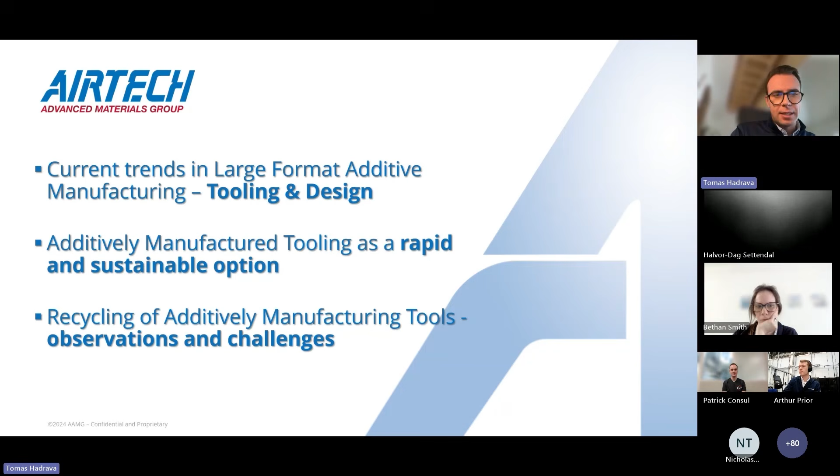And also, I'll be talking about the recycling of additive manufacturing tools at AirTech. What are our observations and what are the challenges? And Arthur actually covered that topic very well.

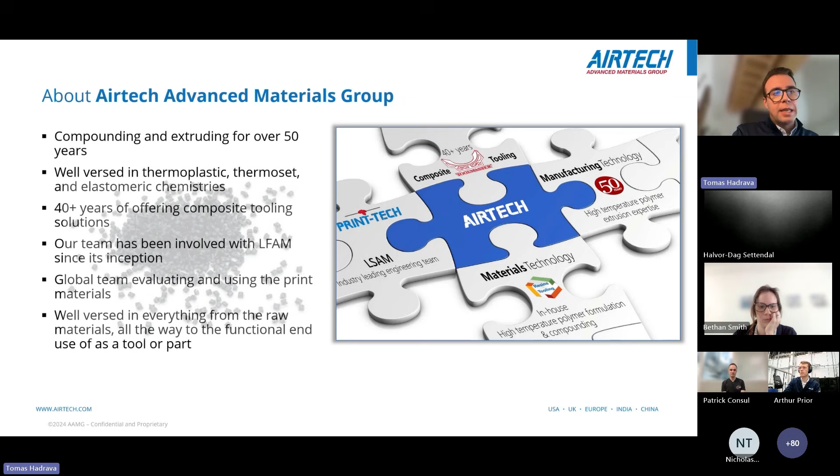Something about AirTech. We were established in 1973, more than 50 years ago. We are known as a polymer extrusion company, mainly active in composite consumables. However, roughly 9 years ago, we started digging into large format additive manufacturing, and our key members have been in the LFAM world since the very beginning, since 2012, 2013. So we are evaluating the options in large format additive manufacturing, developing materials, and also we are working as a service bureau in the US and in Luxembourg.

Something about additive manufacturing in general. This slide is covering the tooling. So why is it a rapid and sustainable option? Well, as Arthur also mentioned before, the printing process typically takes a couple of hours. From my experience, 1 to 2 days. We also printed tools that were being printed for 5 to 6 days. These tools were 12 meters long and 2 meters wide, so we have a huge machine.

But this is the overview of the entire process. There are pellets, there is the extruder, and there is the tool. And on the tool, we see the part which was demolded. So we are talking about direct tooling. You don't need to do pretty much anything else with the tool. You print it, somehow post-process it, but that's it. So I'll be covering direct tooling here.

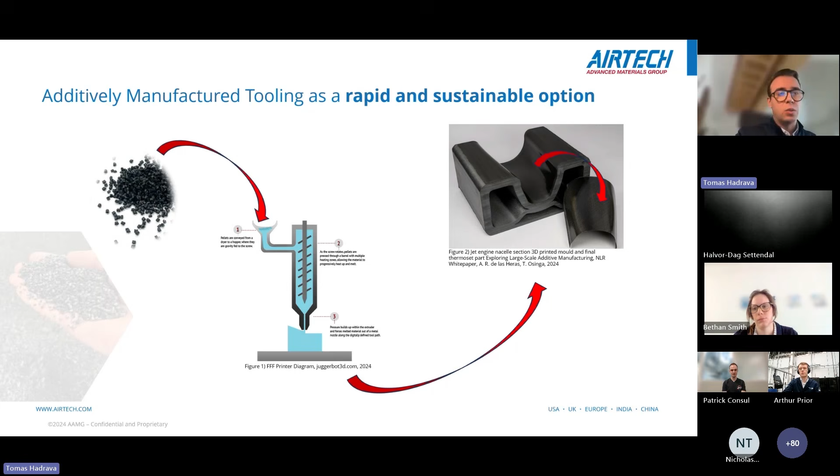A little bit more in detail how the process works. I borrowed this nice overview from NLR in the Netherlands. Basically, everything starts with a CAD file. Then there's a necessity to use a slicer. There are a variety of slicers on the market. The slicer will help to slice the tool and to prepare the printing process.

And then on the third picture from the left, there is the actual printing. The actual printing takes the shortest time of the entire process. That's, as I said before, tens of hours, but nothing more. I would say the biggest time consumer is preparing the CAD file, designing the part, designing the tool, and then slicing.

Of course, when you print a tool, and that applies to all kinds of tools in the market, not only additively manufactured tooling, we recommend annealing these tools. So that's another step, annealing these tools in the oven, and then machining the tools when the stress is already released after the annealing. Then step number 6 is, I would say, the tool preparation. It means sanding, polishing the tool, applying sealers, microporosity sealers, or release agents.

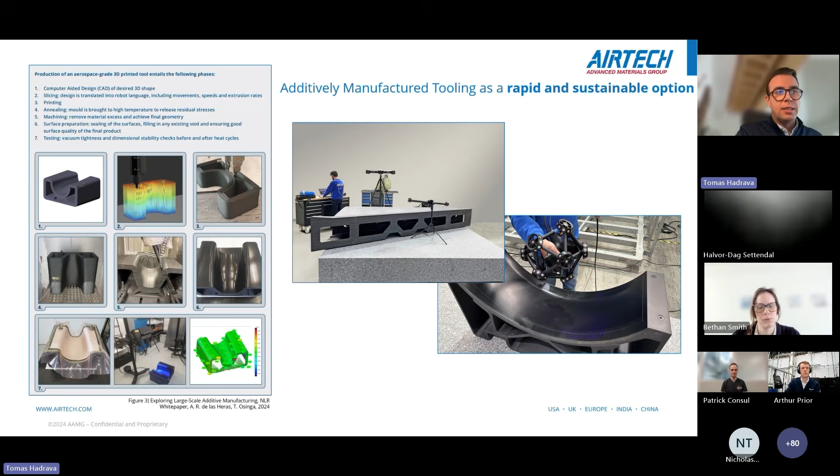Just covering the current trends in large format additive manufacturing in terms of tooling. Here are a few pictures that we already published in the past. On the upper picture, that's the general tool we use for testing. Then we have a picture of a tool that was delivered to a customer in the UK, done for the aircraft demonstrator. The third tool is a tool for resin infusion. It's not visible that it's printed, but it's underneath, I think it's a peel ply, which is right on the surface of the tool.

This was printed out of PETG, and then we have the fourth tool on the right upper corner, and that's a fan cowl repair tool, which was done for a company repairing Boeing 777 engines, which are the biggest ones in the world, if I remember. You can see the tool is pretty big. You can see my colleague there. The tool is roughly, I think, 6 or 5.5 meters long and 2.5 meters high, and also 2.5 meters wide. It was printed in 3 pieces, then assembled together, sealed and bolted together, and now it's performing.

Here on the lower picture on the left side, we have some print of, I think it's a blade for rotorcraft or something. Then another picture, it's a standard aerospace part looking tool with all the stiffeners. I like this picture because that basically shows what AirTech all does. It's the entire tool, the material for the tool, and it's also the material on top of the tool, the composite consumables there. And then we have some other toolings. Here, the last one is the trimming fixture.

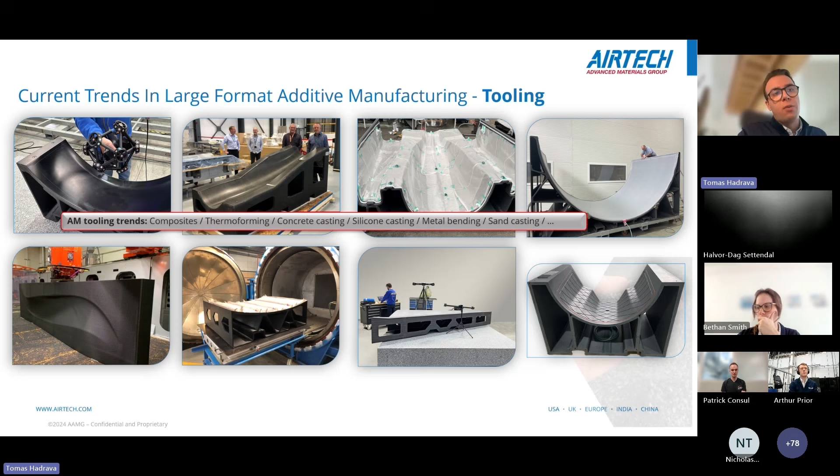There's the opposite world to the tooling, and that's design and end-use parts. Here are a few examples. Nothing really to say about the design. It's really depending on the project and on the designer. I always say I'm an engineer. For me, a color is a color. So green is green, and white is white, and pink is pink. But there are other colors and so I'm learning that. However, it really depends on the project, on the customer. However, from the material standpoint, the development of these materials is, I would say, as difficult as the material development for tooling because the requirements are pretty high. I'll be covering the requirements in the next slides.

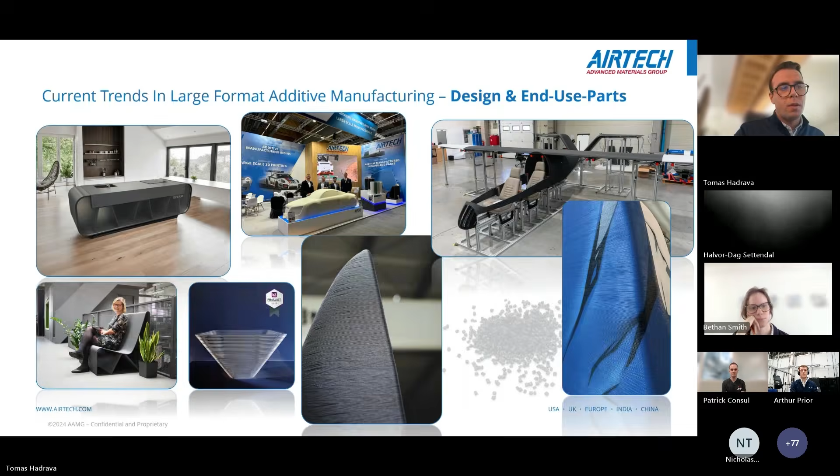The material requirements for tooling materials. So coming back to tooling, then I'll switch back to design. For tooling, of course the material needs to be highly thermally stable, needs to have a low coefficient of thermal expansion, good mechanical properties, excellent dimensional stability over time, so not only for a few parts. Again, good mechanical properties, good surface machinability. I think Arthur mentioned it as well. Most of the tools are CNC machined and then polished after the manufacturing process. So the material itself needs to be capable of these actions.

Strong interlayer adhesion. We always teach customers to respect the rule of layer time and layer temperature. And then, of course, the material needs to be chemically resistant when you apply the release agents, sealers, but also when you clean the tool with, for example, isopropyl alcohol or similar.

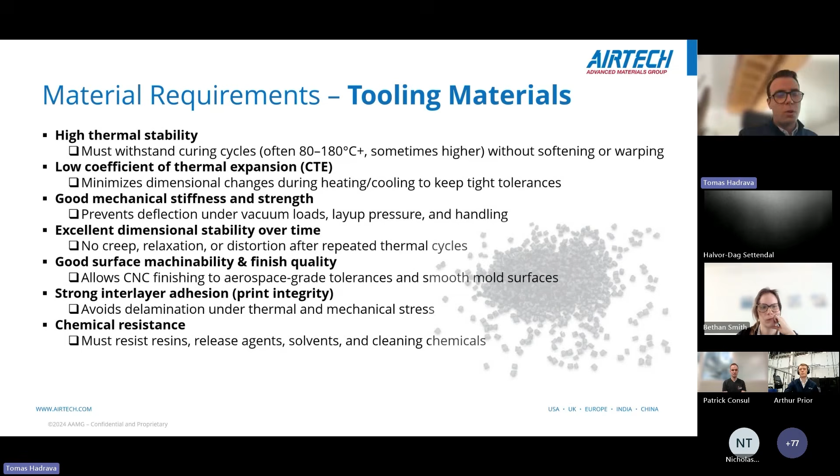And now, material requirements for the design and end-use parts. Typical requirements are salt, water, and moisture resistance, then UV stability or weathering resistance, depending where the object will be placed. The big thing is the flame retardancy, so FR rated materials, or at least low smoke rated or low toxicity rated materials. High impact resistance, again, excellent mechanical properties. Thermal resistance; we have applications that are being printed for Dubai or the UAE area, so you can imagine that the temperatures there can go pretty high.

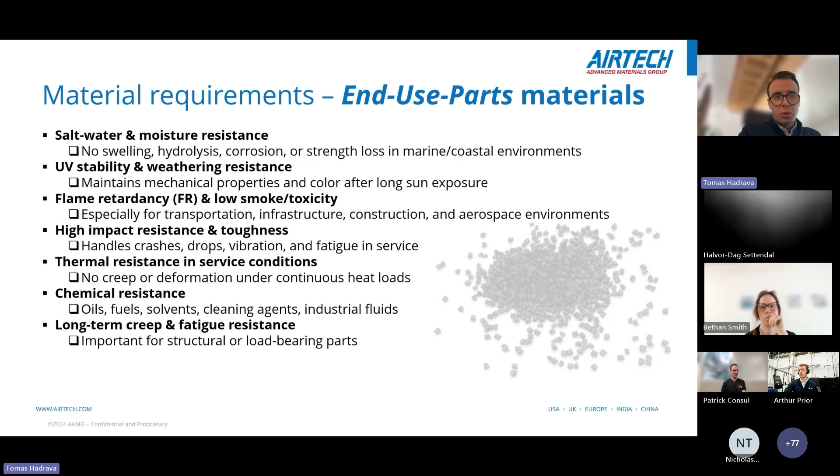Chemical resistance, again, long-term creep, fatigue resistance. I would also add one more, which is yellowing. I know that it's a big topic now in the designer world, where the customers want to have a clear material, but they want a clear material which will not turn yellow in 1 or 2 years placed outdoors.

What materials are used in general, or what materials are meeting these requirements? I would say these are the most used. There are also other, for example, polyolefin-based materials that are also being used in additive manufacturing widely. But in the tooling, it's mainly PETG, ABS, polycarbonate, and PEI or PESU.

The high temperature materials are typically filled with carbon fibers. The low temperature materials or the medium temperature are filled with glass fibers and carbon fibers. In terms of the design materials or the materials that are used for the end use parts, it's similar. However, we don't see big demand for the high temps, I would say.

It's mainly polycarbonates, a lot of PETG, I would say mainly it's PETG, but we have some niche materials like nylons, recycled nylons, elastomers, and again, polycarbonates, depending on the project. There are really very specific requirements for these kinds of applications.

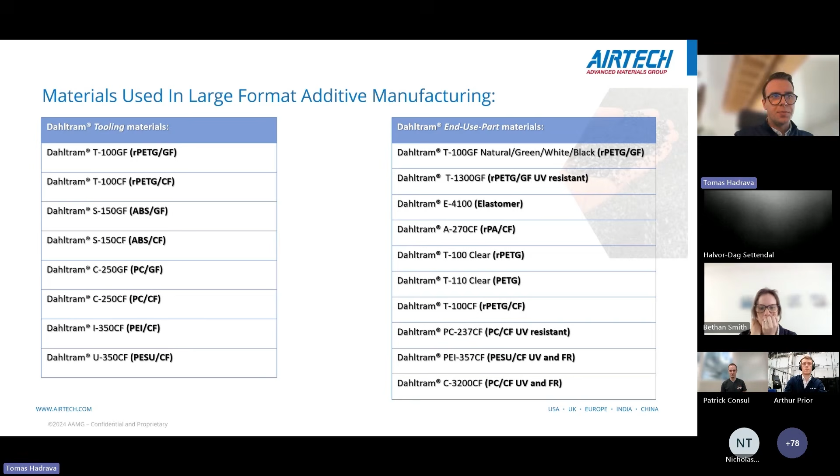Arthur covered that very well. I just want to make sure we get a point: recycled and recyclable. Most of the time I'm traveling and visiting customers, and we talk about materials and how we can recycle them, whether the material is recycled or recyclable, and then on top of that there is the accent thing, right? My accent or the customer accent.

So there are the recycled materials and recyclable materials, where the recycled is the one that already somehow worked in the previous life. We have the recycled PETG. Then it means that that kind of PETG already was working somewhere else in a certain industry. It might be water bottles or the packaging industry or anywhere where we can find PETG.

However, the recyclable material is the virgin material, but it can be recycled after the installation, the project is over, after the tool is not needed anymore. Then you can take it and recycle it, how Arthur described it. I'll be also covering that in the future slides.

So two different things. I would say most of the materials used in large format additive manufacturing are recyclable. There might be a few exceptions, but most of them are really recyclable, and some of them are already recycled and are working pretty well.

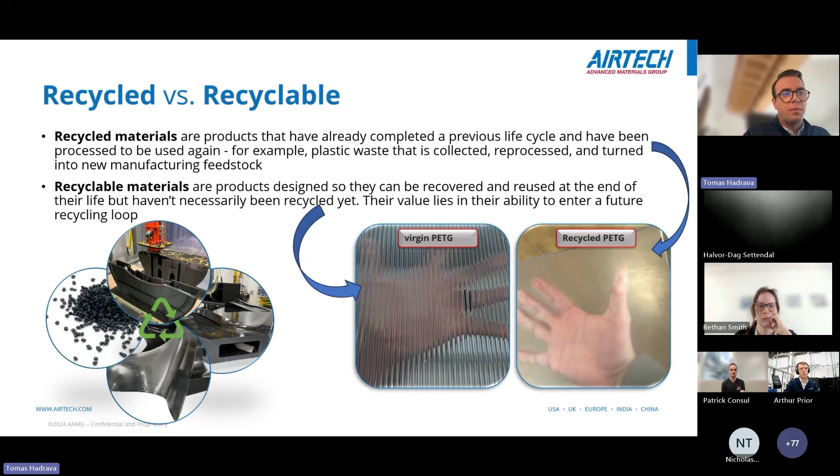Recycling, the observations, what we have or what we've done, because we recycle material internally for our own use at the moment. I'll be talking about this particular project done in 2024 for a customer in the US, where we took back the tool from him. We cut it into pieces.

Then later on, we used the industrial shredder to have the smaller pieces, the shreds that we would later be using. However, we used the repelletizer or the compounder. We recompounded them again, and we again manufactured pellets.

This was done with polyetherimide and polycarbonate, because we believe that when you print high temperature tooling, let's say going up to 145 degrees Celsius or 180, 200 degrees C, from the printing perspective, it's beneficial to have a uniform size of the pellets. However, for other applications, it might not be necessary, but this is how we do it, and this is what was working for us. So again, everything was cut into pieces before we sent it.

Everything from the release agents, from sealers, we removed all the inserts and all kinds of resin residues that were there before, and then we used the industrial shredder, and then the pieces we again poured into the compounder, recompounded them, and manufactured pellets.

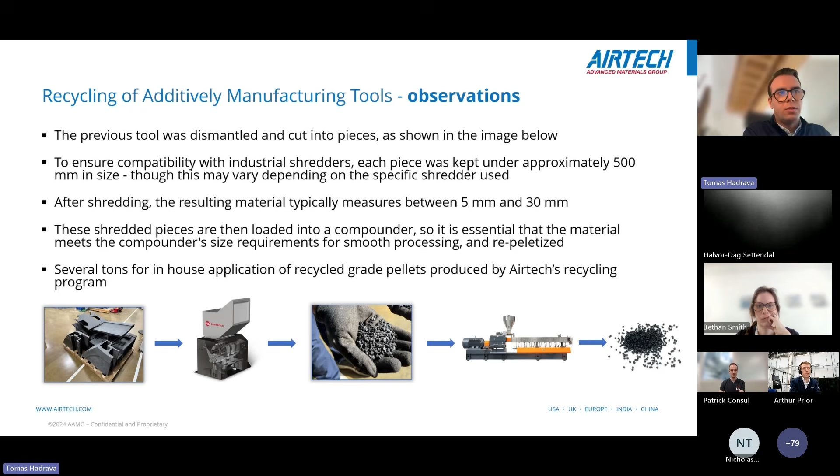As discussed before, there is a certain way of blending these materials. MTC already did that in the past. Very nice project. So I think it's a good job to all MTC people.

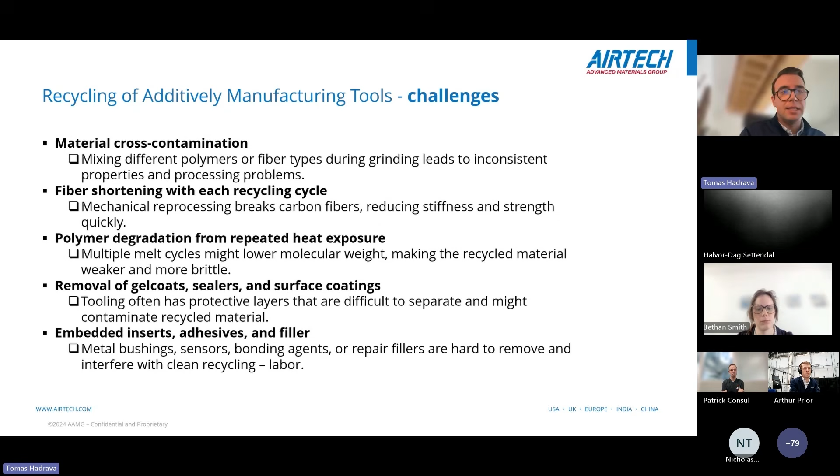Just challenges here. I'll be wrapping it up very quickly. It's cross contamination, shortening fibers after each time, polymer degradation. It's necessary to remove gel coat, sealers, surface coating before, and of course all the inserts, adhesives, fillers, everything that you will not need in the recycling process.

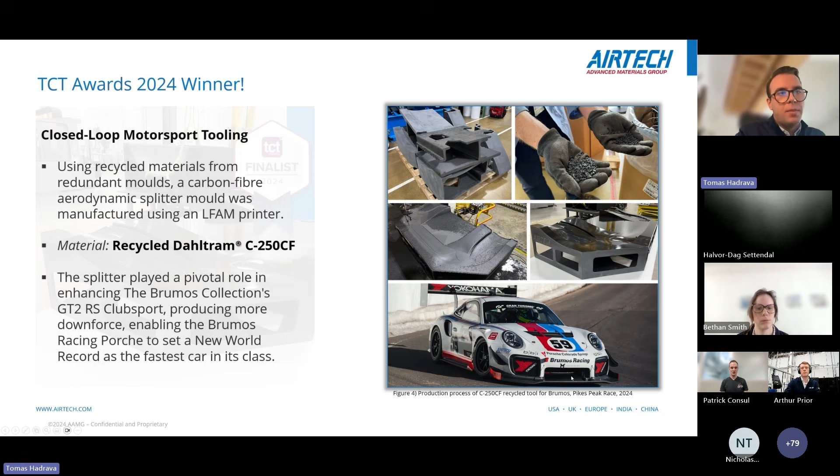Last slide from my end. We got the TCT award in 2024 for this kind of project, where we took the tool from the Brumos racing team that races in Pikes Peak in the US, and we took it back, manufactured a new tool for them, and for next season we made it ready for them, and we made the front splitter tool for them. They won, so I hope it was because of that project.